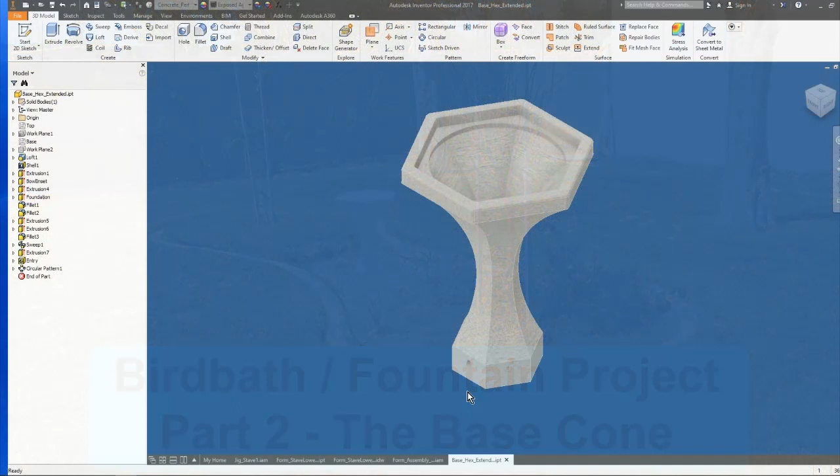Here we are back in the 3D modeling world in Inventor, looking at my birdbath, getting ready to build some forms. This is the existing model where I have extended the base. That's the only change I've made. And we zoom into the base here. I've extended it 1.5 inches or 2 inches, I don't remember. I've also added a couple of holes, which weren't visible before.

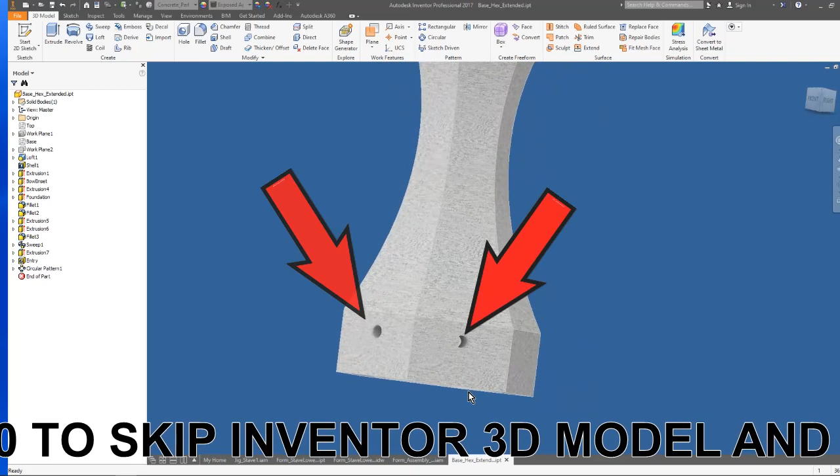Those holes are just about a 1-inch ID, and it's based on the outside diameter of 3/4 PVC, which is what I'll use in the forms to cast the holes. So here we go, where it's time to start building forms.

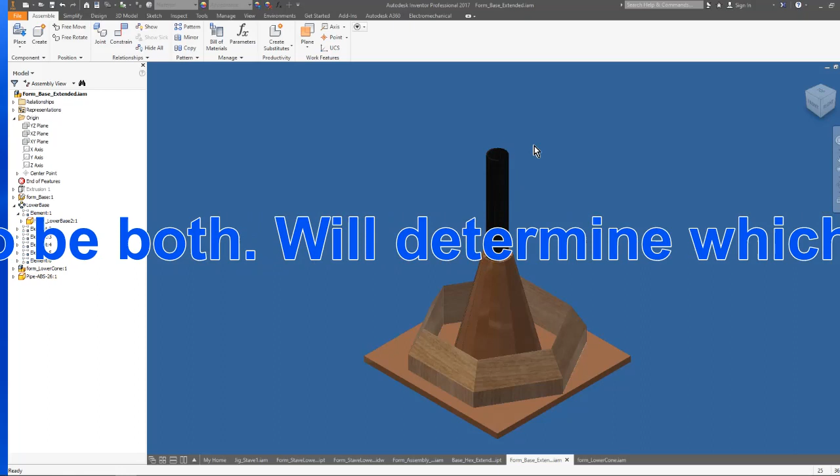Now we're looking at the assembled lower base of the form. This is all going to be one piece, with the exception of an ABS PVC pipe that's going through, connecting the top of the form to the bottom of the form. This is for wiring or plumbing that I want to route from top to bottom. We've got this pattern of hex, what I'm calling the form lower base, and the actual base.

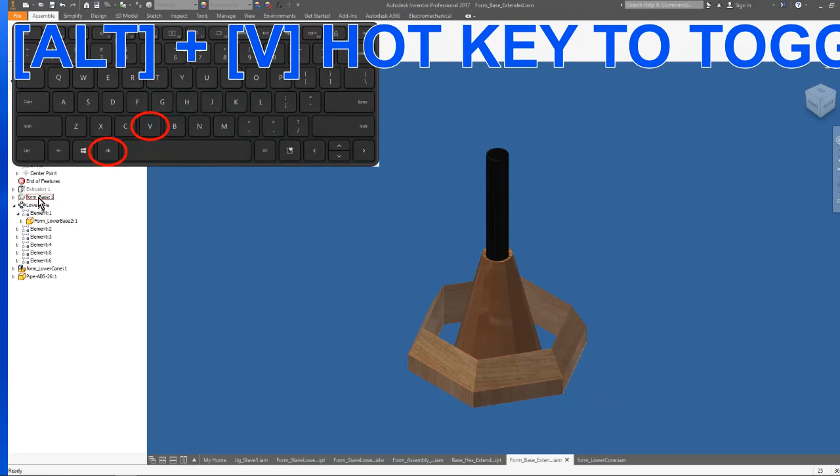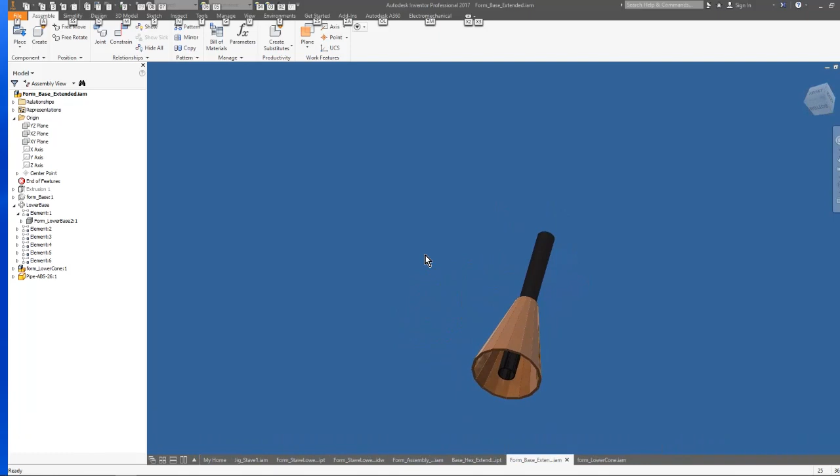So the first objective, of course, is we're going to be building the form cone. Turning off the other parts. And you see how this form is set around the tube. As we rotate it around, we can see the tube goes all the way through to the base, and that cone is hollow. I don't have a lathe. This could be easily turned down on a lathe. I don't have one of those, so we're going to build this just like a barrel. So that's the step we're moving into.

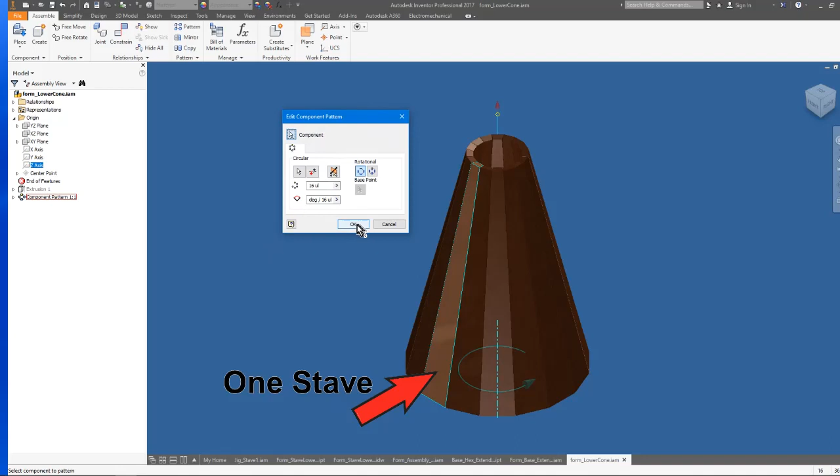Now looking at the cone itself, you can see it's built up of a pattern. Take a look at the pattern here. It's built of a pattern of 16 staves. The term stave is what's used to describe the parts of a barrel that come together to form the barrel. So we've got 16 staves around 360 degrees to form a cone as a barrel. And up close you can see the angles that have to be cut into these staves to form the cone.

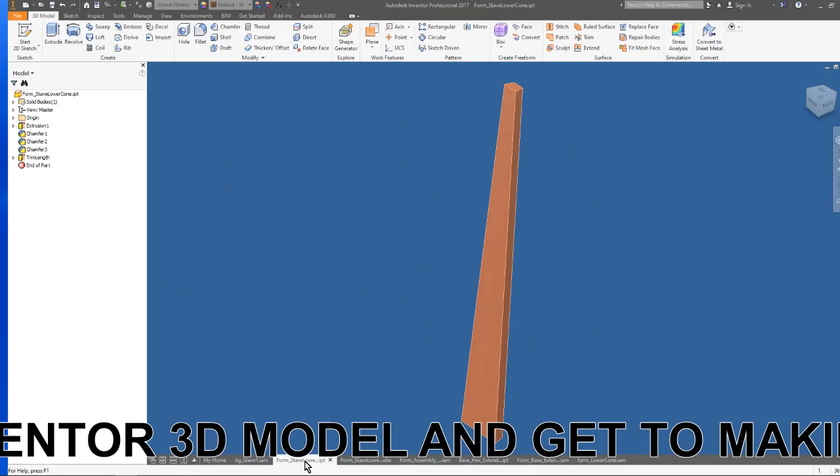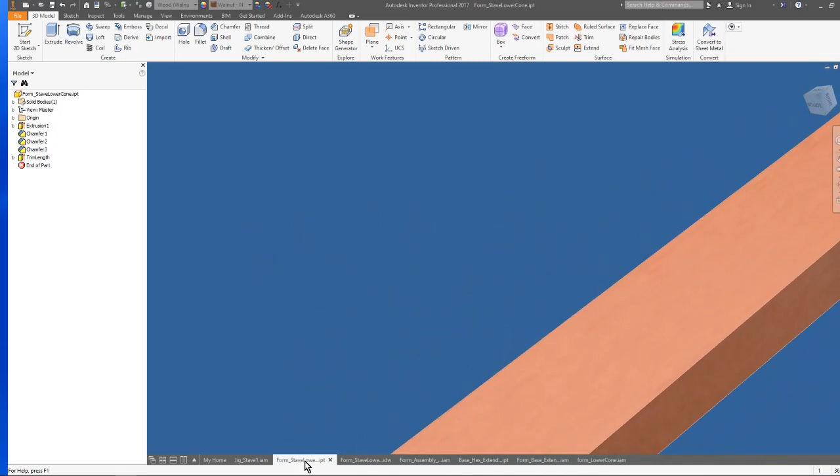And here is an individual stave. As we rotate the stave around, you get a better look at the angles that we're going to need to cut into the stave in more than one axis. So not only is it tapered, but we have to cut an angle into that corner.

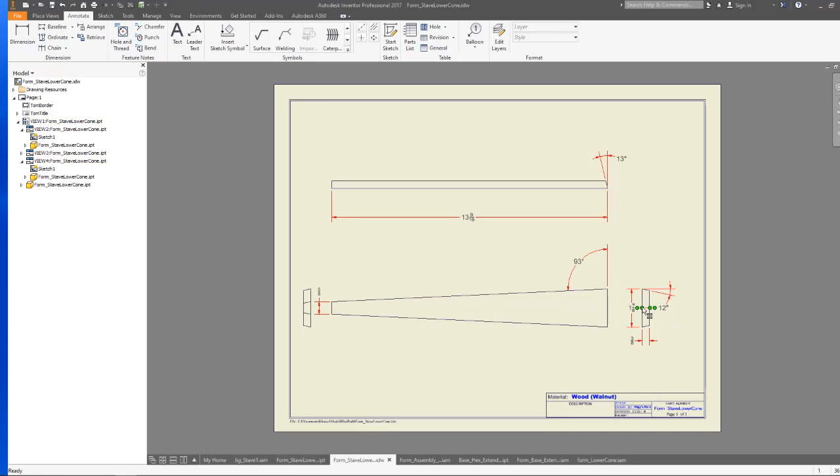So now, taking a look at the print, we can see what I have to make. It comes out to be 13 9/16 long, as we can see here. 13-degree angle at the base, 93-degree angle for the taper, and a 12-degree angle for each side, and it ends up being 1 7/8 inch.

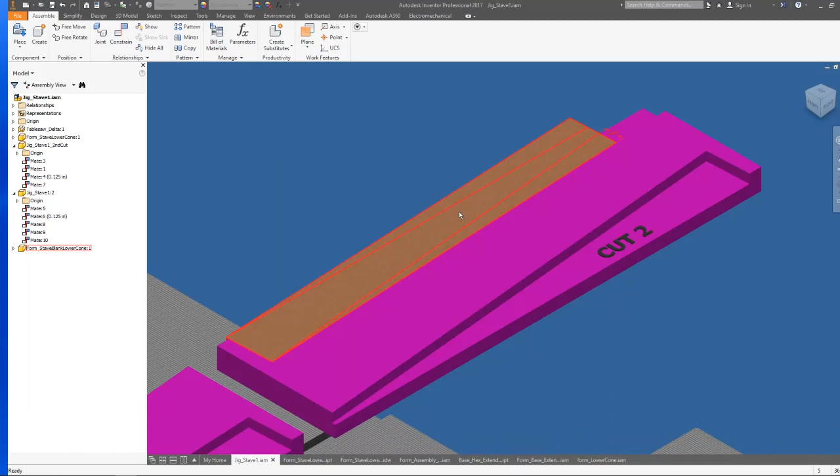Now to get a look at how I'm planning on cutting this out. Here we see a very rough model of my table saw. On the table saw, we zoom in a little closer, I have a blank that will be cut out to start with. And that blank will be set on this jig that I've designed. I haven't built it yet, I've just designed it, and it's got two sides on it. The one in the front, I've got the blank in the position that's called cut 1, as you can see down here. And the one next to the simulated saw blade is on the side that's called cut 2.

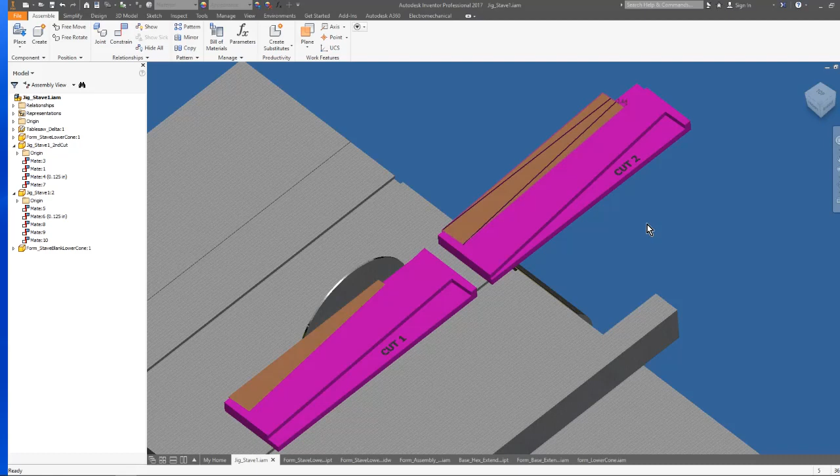So I will put the blank on the form, run it through the blade with the blade set at the proper angle for the sides, and it will cut out my staves. This will allow me to make 16 staves that are identical. The actual dimensions of the cone are not critical. What is critical is that each stave is exactly the same, so it comes into the shape of a symmetrical cone. So this is my challenge coming up, to manufacture that jig that's going to allow me to cut out my staves.

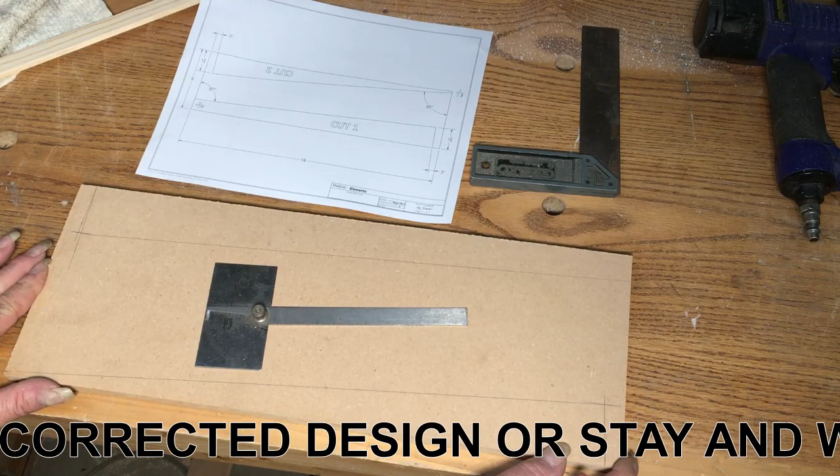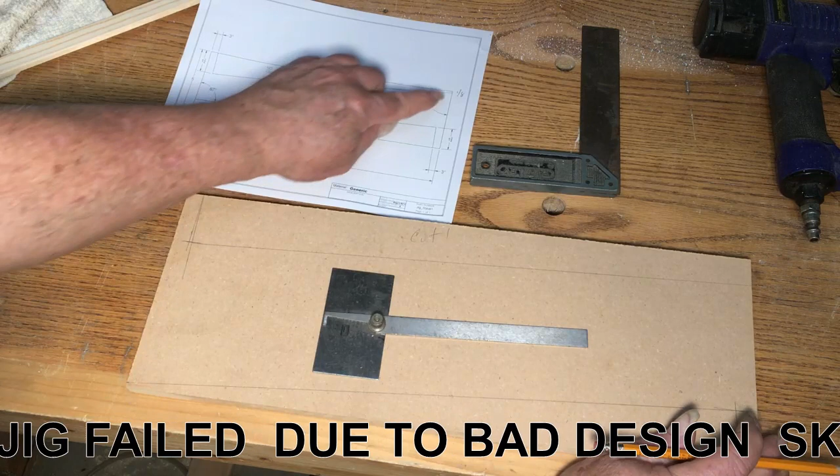Now it's time to start making sawdust. Here's our print for the jig that we're going to use to cut out the staves. Found a piece of 1/2 inch MDF, which I'm going to use as the base plate, and I have sketched out the angles on both sides. This side with the longer end is this one here. This will be the first cut, and this one with the shorter edge here, as you can see right up here, is going to be the second cut.

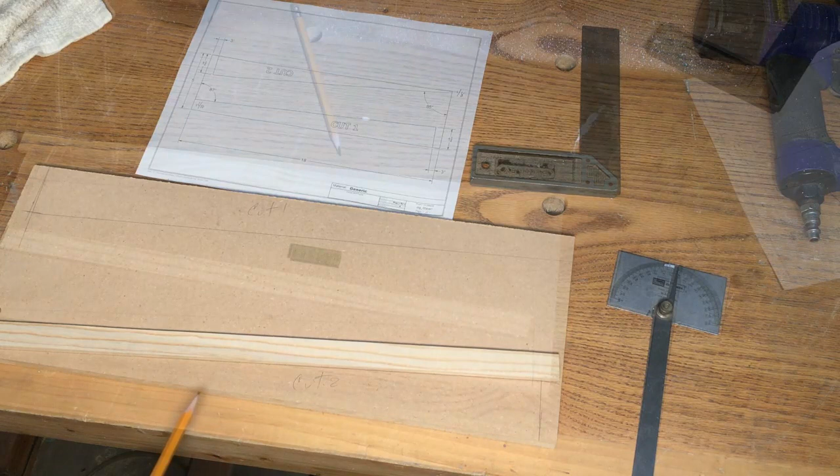Now, I'm not going to machine this out. That's way too difficult. I found some thin scrap pine left over from another project, and I'm just going to line it up with the lines here, here, and of course on this side, and staple them in place. And that will be my cut jig. Here's the staples we're going to be using. For the first layup, I'm not going to glue them in place, just in case something doesn't work out right, so I can redo it.

Got my staple gun ready. Load the staples in place. Add a little bit of air. I've got to do this around the camera, so this is going to be a little cramped for me. You can't see what's going on behind the camera, but I'll make sure I've got some nice clean edges.

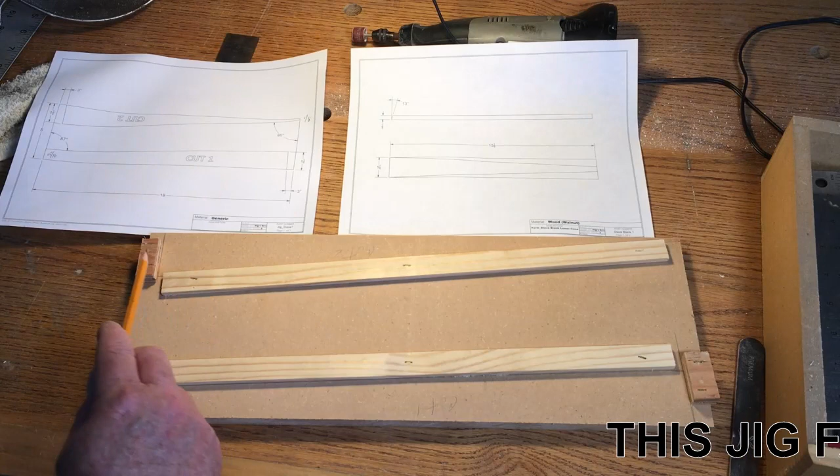Discovered real quick this had to be a thicker material than this because our blank's going to have a 13-degree cut in it. See if we can see this. Here is the blank and the 13-degree chamfer here, which goes up against that stop. This material is much thinner. Using this as the stop meant it went into the chamfer instead of actually butting up against the edge.

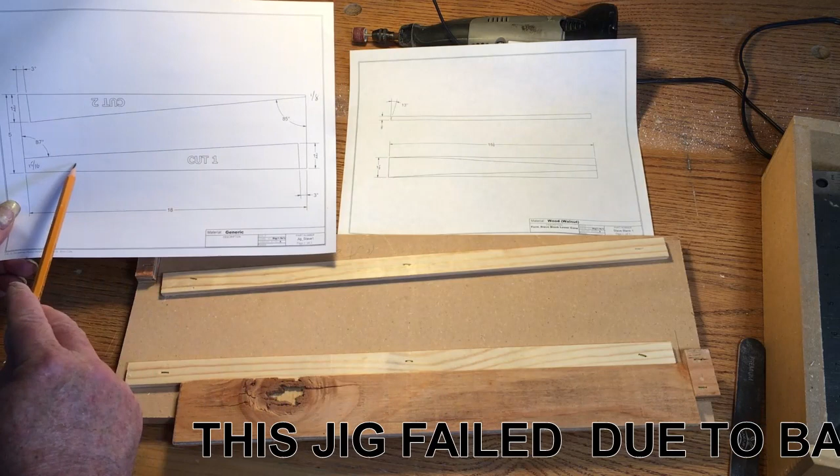This is an ugly blank. This is just a test cut to see how it turns out. So this is how everything's set. We're going to set it up on here. We're going to make the first cut, which will be this one right here. I've got to set the blade angle, and I don't remember what that is. We'll have to go get the print for the actual stave to determine what my angle cut is in here.

And this is the dimension of the blank, 1 7/8, 15 1/4. And this is just sketched what will be the finished cutout for the stave. It's based on 3/8 material. I don't have much 3/8 plywood, so I will probably end up resawing this out of pine to get my 16 pieces. So next up, we're going to get over to the table saw.

Getting set up on a table saw, first thing we're going to do is set the blade angle. Bring our print in here, we can see we have a 13-degree angle on the base and a 12-degree angle on the sides. So we're going to have to set that for a 12-degree angle cut.

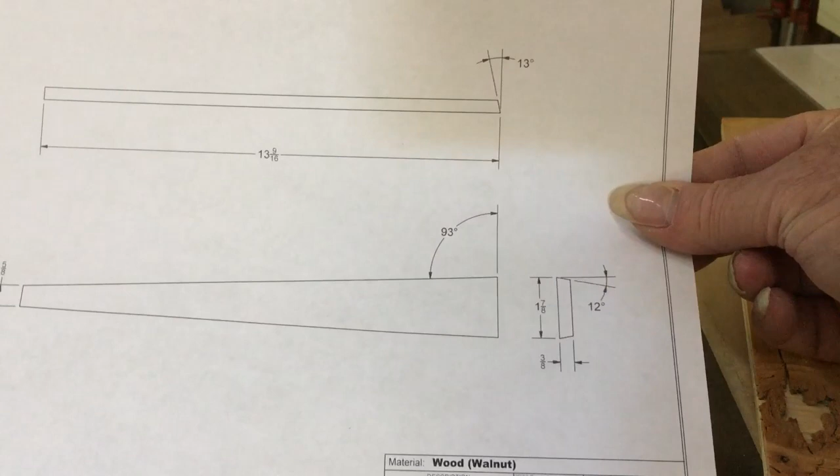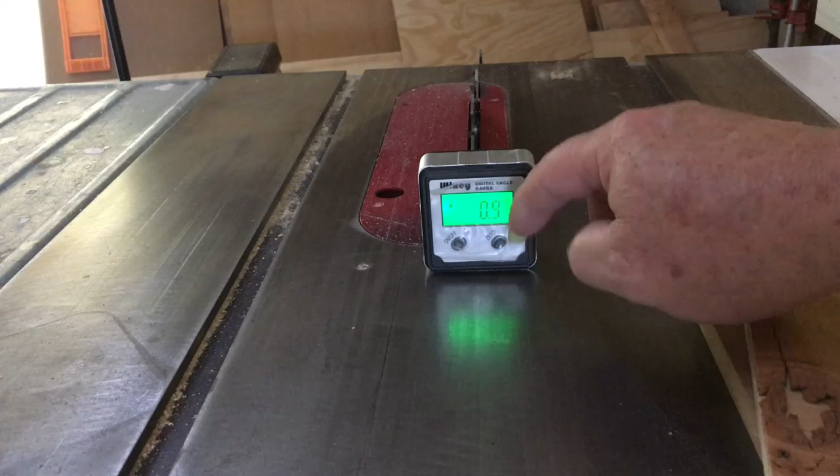First thing to do with my angle guide is zero it on the base. Now we're at 0. We just clip it on. And we're going to have 12 degrees from 90, which will be 78. And there we go. So we got a 78 angle cut. And it's time to make this go.

As I was getting ready to cut, this is the bevel side. This is the outside of the cone, so it'll be sitting like this. Tapered, of course. I realized this is the outside, but this taper goes to the inside, so this has to be up. I almost made an error there, which actually means these blocks do not have to be taller than this. They can be the same size as the other ones. Because this tapers up, I label it inside up so I don't make a mistake.

Now for setting the fence, I'm going to make sure there's no debris here on the table. This is the last part of the cut, and it is going to be right on the blade. Something is stopping my fence from moving. I'm going to have to go get my little dink and hammer, because I can't do this with one hand.

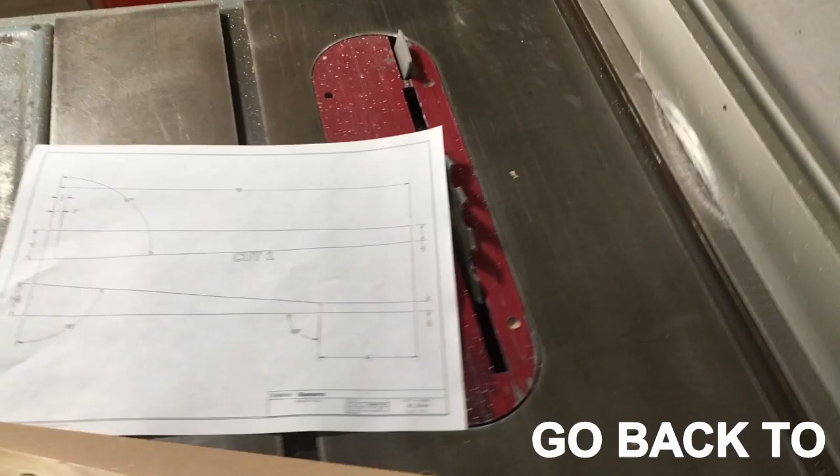We've got the new layout for the jig. Changed some things around so that the taper should be on the inside both times. I did the same process of putting the jig together, I just didn't film it, and I have a new blank ready to cut. Table saw fence is already set up. I did exactly the same thing I did before. If you didn't see that video, you'll have to go back and see the one where the jig was incorrect. The first one I built was wrong. So let's get set up on the table saw and make the cuts and see if this one turns out.

I may have to pause this before I make cut 2. I don't know, when I do this cut here, I already proved the other one's okay using the push stick. Do not know if using the push stick is going to work on this one, so I may have to pause and put in a clamp. I've got the inside marked as well as which side is the base this time. Double check this corner. Should be the last thing cut, and it's cutting too deep.

I'm at 7 1/16, we'll write that down. This is the last of the 3/8 scrap stock I have, so I need to be careful. I'm going to add a 16th to that. I need to be careful not to destroy this as I'm making these cuts. A long way to work. Seems as though they're right first time. Not there yet. Right there. And that's it. 7 1/8.

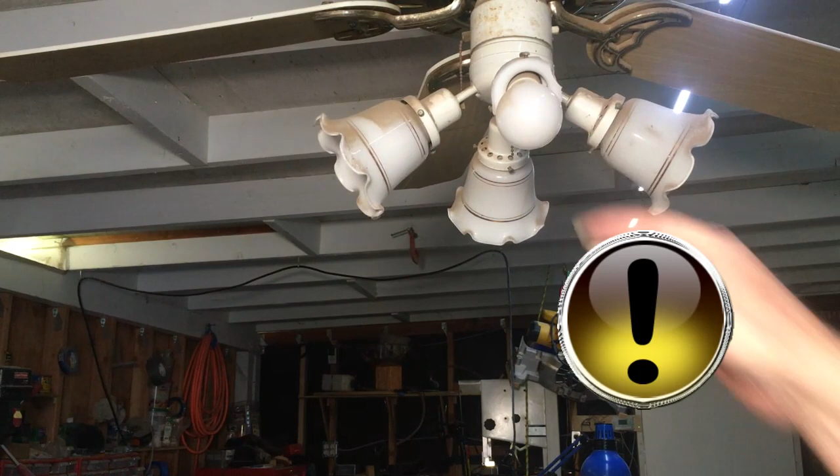They're all cut. And now the big mystery: how am I going to clamp these together to form my cone? Don't know yet. We'll find out in the next video.